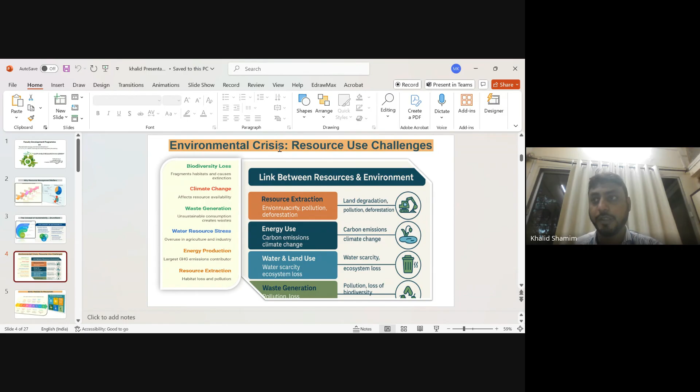Then we have to understand water stresses, like depletion of aquifers, water qualities - that is more important - and water waste generation. That is again one of the important aspects when we talk about resources and environments.

When we think about environmental pollutions, we have to think how these pollutions are being created with respect to industries, population, habits, quality of life, climate change, and biodiversity. This is important because these two factors are correlated with each other.

When we have resources, we have to think how the resources can be benefited with respect to environments. We have to think how this environment can be more efficient, more beneficial to these resources. That is important when we talk about the link between the resources.

Now when we talk about this link, we have to understand how the global markets think about it, and we have to think about the sustainable development goals. This is a very important criteria when we think about sustainability, because 17 sustainable development goals have been identified by the United Nations Sustainable Development Goal.

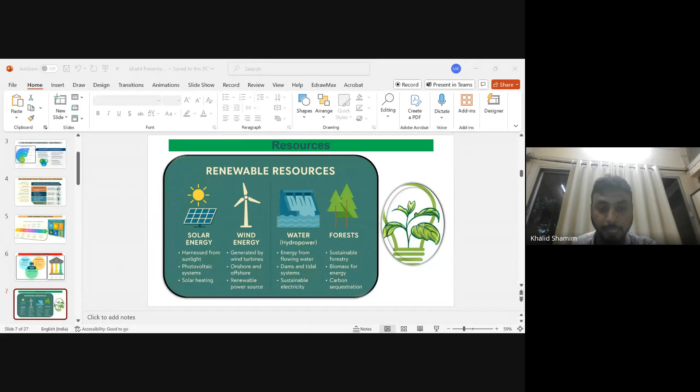Now when we think about non-renewable resources, there are not many of them, but we have to understand they are finite resources. We do not regenerate or recycle them, and we have to understand how they are extracted and then consumed in non-reusable ways. They are more vital for industrial growth and technological development, so there is a lot of importance to these non-renewable resources.

When we think about fossil fuels like coal, oil, and natural gas, they are generally the backbone of industrialization because they yield high energy, giving high energy density. When we go for coal, it generally goes for power energy, mainly for steel industries. So we can understand how these resources are more beneficial to industries and societies, when we think about petroleum and natural gases.

So the challenges that we are facing are nothing but the greenhouse gas emissions, the air pollution emissions, like CO2, NOx, SOx, PM 2.5. These are the challenges when we go for fossil fuel consumption.

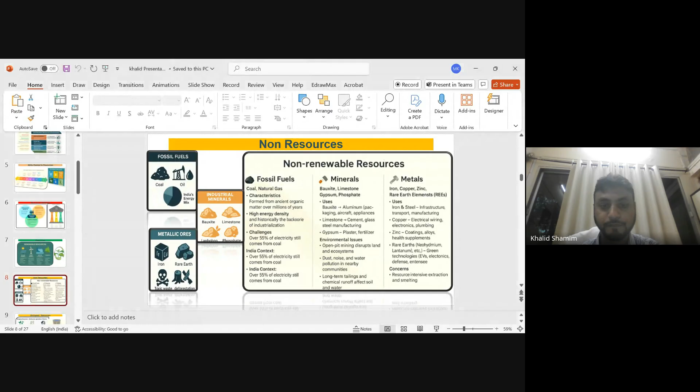Now this is again an important aspect about biological resources. These biological resources generally refer to naturally occurring living organisms which drive ecological balance, livelihoods to security, and generally include wild species, crops, marine organisms, and microbial biodiversities. So when we think about biodiversities, the variety of life forms like genes, species, and ecosystems are generally there.

Which generally supports ecosystem services. When we talk about water purification, climate regulation, it generally supports water purification type of things, wastewater treatment type of things. It generally acts as a natural insurance system for environmental shocks.

And it is also used for medicines, for crops, and biotechnology innovations. And when we think about the challenges, it's nothing but deforestation, pollution, habitat loss, and over exploitation, which generally leads to one of the climate changes. So this is again when we think about biological resources, the term comes to biodiversities.

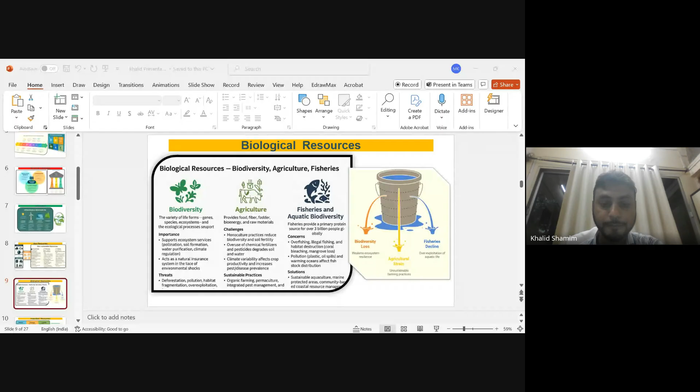Now when we think about this sustainability, as I have already given you solutions like renewable resources, non-renewable resources, and biological resources, the main criteria is nothing but the important resources that we deal with day to day, that is, water resources, energy resources, and land and soil resources.

Very important when we talk about water, which plays an important role in life, used for drinking purposes, for agriculture, energy production, industries, and ecosystems. It must be free from diseases, as it affects public health.

If it is affecting public health or community health, that means the resource is not beneficial to society, and that again leads to economic impacts.

When we think about water resources, the important parameter is water scarcity, as over 2 billion people are facing water stress as per UNESCO. This is generally caused by over-pollution and over-population.

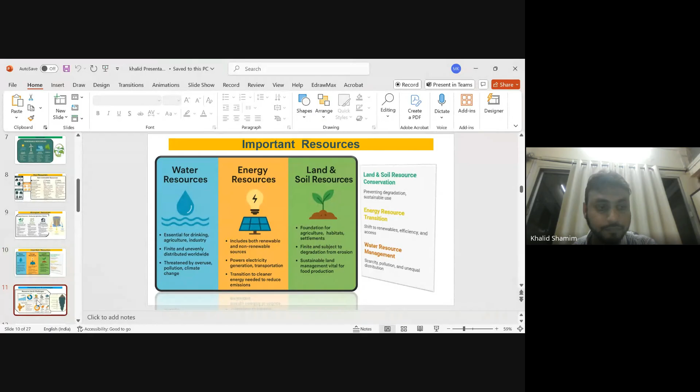So this again relates to the challenges we have already discussed, such as food security, water scarcities, overfishing, and deforestation. So we'll move ahead.

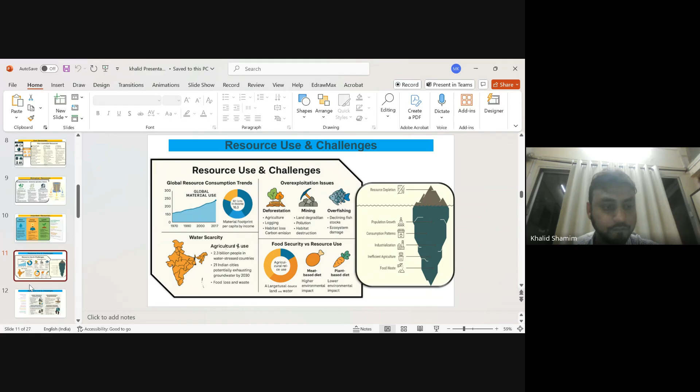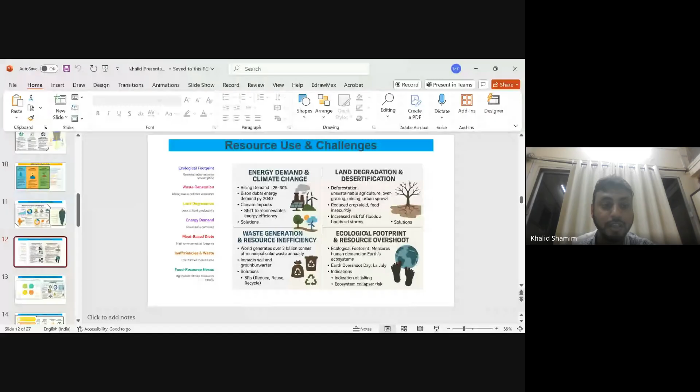Now, when we think about these challenges - overpopulation, climate change - we have already seen waste generation, energy demands, ecological footprints. These are the challenges we are facing globally, faced through per capita footprints and resource inefficiencies. We are thinking about land degradation, over-exploitation issues, deforestation. These are the basic challenges that every country, every nation is facing: energy demands, waste generation, land degradation, inefficiencies, and food waste.

Now when we think about policies, or the principle of sustainable resources management, we have to be more focused on reduce, recycle and reuse. These three concepts are more important when we think about this principle. For reduce, we have to be particular about minimizing resources at the source. For reuse, we have to think about how we can reuse materials or things. For recycle, we have to understand the procedures of recycling. So based on this principle, we focus on reduce, recycle and reuse. Second is the economical concept.

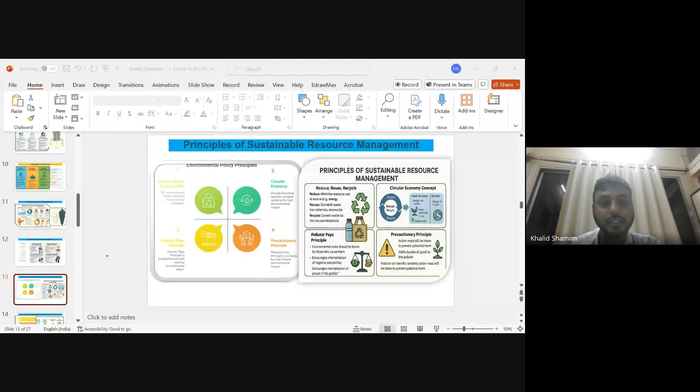Then there's the precautionary principle - action must be taken in terms of law, in terms of some sort of act, in terms of equities, intergenerational equities, and balance between water, electricity, and anything that leads to environmental injustice. We have to make sure there's more emphasis on these principles. So this is the principle of sustainable resources management.

Now again, based on the principle of sustainable resources management, we have integrated resources management. This generally coordinates and has a holistic management approach - for example, a holistic approach for water, land, energy, biodiversity - and cross-sector collaboration between governments. Because it's integrated, it benefits efficient resource allocation, reduces trade-offs, and encourages co-benefits like water retention and biodiversity. It is also important when we talk about equity in resources management.

Equity in resources management - we think about this equity as nothing but fair allocation. There are challenges when we think about equity of resources, and these challenges generally align with the sustainable goals. We have to identify energy efficiencies, think about policies, investments and investigations based on that. So this is resource equity in resource distribution.

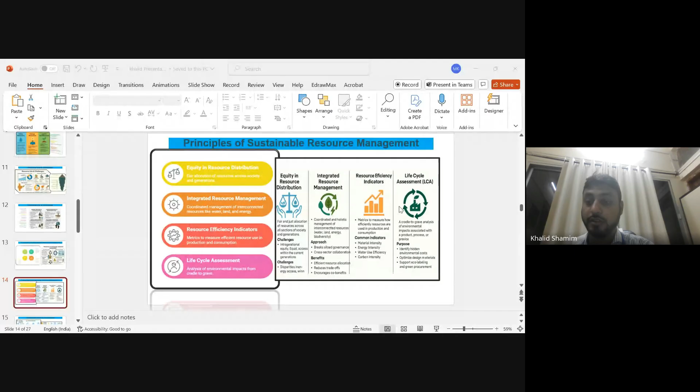Then life cycle assessment - this is a cradle to grave approach for environmental impact. The purpose is to identify the hidden environmental costs based on optimum designs and materials, and to make sure it supports green environments. More stages are given importance, in terms of raw material, end of life disposal factors, and recycling process has been given more emphasis in life cycle assessment, along with manufacturing and distribution systems. So this is about resources management.

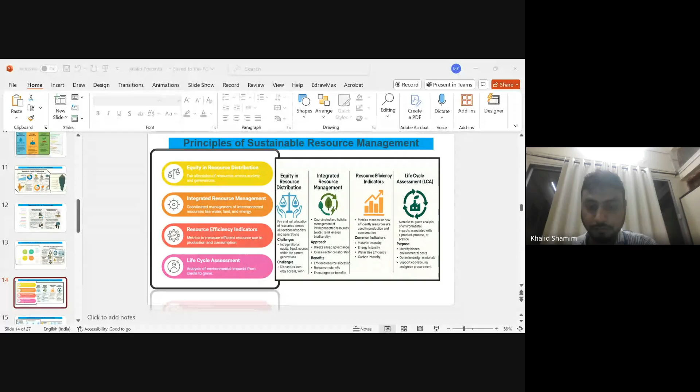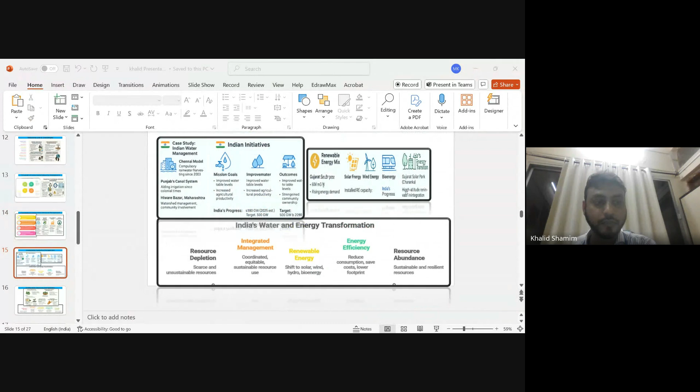Sustainable resources management - now when we think about these sustainable resources, this is the case study of Indian initiatives. We talk about Indian case studies, Indian water management, and what Indian initiatives have been taken place.

When we think about the case studies, we put more emphasis on the Chennai model, where compulsory rainwater harvesting systems have been adopted since 2003. This makes sure water resources are safe, and it has been one of the good models, good practices.

Again, when we think about the Punjab canal system, it generally aids for the network for irrigation systems. And Hiware Bazar is one of the areas in Maharashtra where we find proper watershed management, and water stress is being reduced just because of this watershed management.

Based on that, more emphasis is given by community engagement, and more emphasis on the mission goals, where improvement in the water table level is given. More emphasis is on water quality monitoring, grey water use, and agriculture sector productivity. More emphasis is on sustainable groundwater management and water quality - whatever water quality is given must be good enough for consumers.

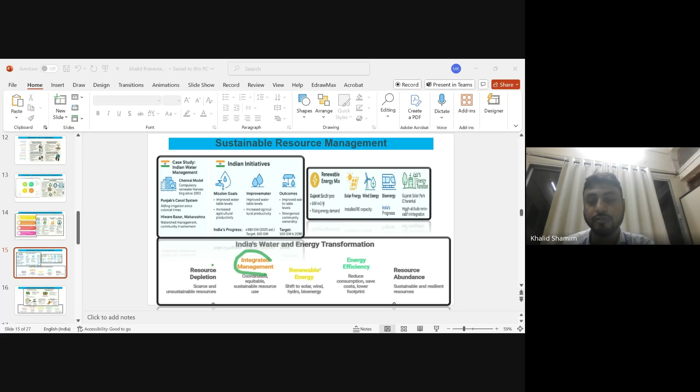Now when we think about sustainable resources management, there are four to five important parameters like forest resources, community forest management, and agriculture sectors. When we think about forest resources, we are maintaining ecological functions, biodiversity - it's important that forests are enough because they consume more carbon dioxide, so it's very important for biodiversity, for soil protection, and for communities which rely on these forest resources. So community forest management is very important for sustainable resources management.

The important thing is local communities which are protecting and managing the forest, maybe for rural populations, enhancing the local livelihood of people living in local areas. Now there's joint forest management, which focuses more on the efforts taken by forest departments and local communities. This improves forest quality, and we generally give occupations to people near that particular area.

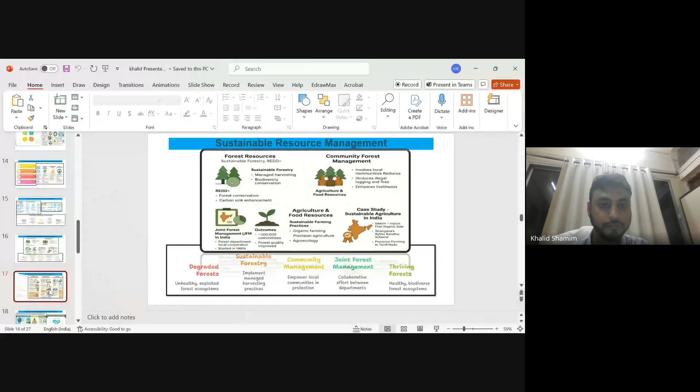Sustainable resources management also comes in three or more four sectors: when we talk about minerals, when we talk about the industrial process, when we talk about construction activities, when we talk about urban resources management. So when we talk about urban resources management, we must emphasize the city designs, which may go for green buildings or energy efficient design type of things.

In sustainable cities, sustainable infrastructure generally goes for waste collections, more important in the infrastructure, waste collection, energies. Then we are more emphasized on rooftop garden type of things. So this is nothing but urban resources when we think about sustainable cities. And the Indian initiative is nothing but the 100 cities focus, which may go for these sustainable resources kind of things.

But when we go for construction, means C&D waste process, construction and demolition waste, we know that it is the waste which generally generates more numbers in tons when we think about it, and mainly includes steels, wood, plastics, bricks, and it becomes more significant in metro cities. So the impact generally goes into mining, energies, and reducing the landfill sectors.

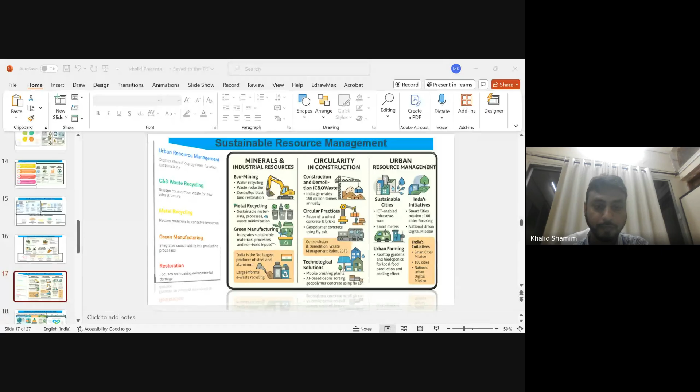Now, the important scenarios or experts show how governments are taking more thinking on the policies, governance and economics, because this is the sector where the government has to take a lot of initiatives, and the government has to make certain types of policies which must benefit the societies and benefit the resources.

We generally focus on poverty, we generally focus on ecosystems and proper land use, which is divided into social and economic strength dimensions.

When we think about these sustainable development goals, it generally promotes green economies and frameworks for sustainable development. Goals 6, 7, 12, 13, 15 are very correlated with sustainable resources management. We generally give more emphasis on forest conservation, greenhouse emission reduction, and circular economy waste reduction.

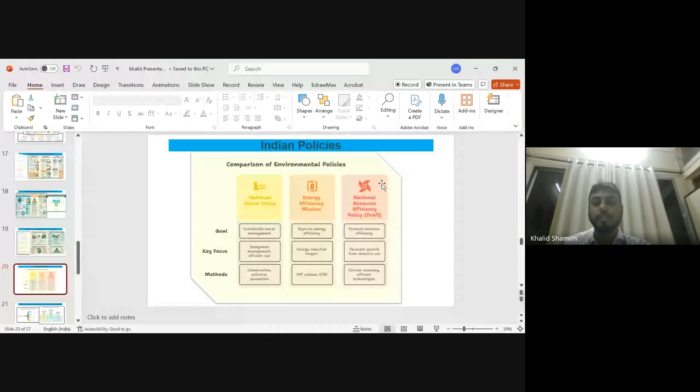Now when we think about Indian policies, we have a lot of policies, but we may focus on these three: national water policy, energy efficiency mission, and national resources efficiency policy, which generally promote sustainable water management. Their goals are water management, sustainable water management, energy efficiency, and promoting proper resources management.

And the main methods generally focus on consumption, conservation, pollution, and preservation. These methods are based on policies like PAT policies and circular economy policies.

Now, when we think about the case study, let's go for one or two case studies. First is the Singapore case study. This is a global case study where it has four important parameters, where imported water and four national taps have been given for good resources management, which generally aims for overcoming its fresh water scarcities. So four important things are given.

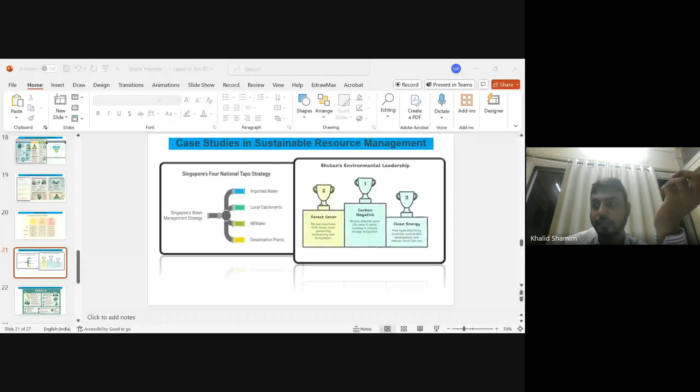First is the imported waters - this is a long term arrangement where water has been imported from Malaysia. Then rainwater harvesting system is again one of the key factors for canals. And we can understand the desalination plant, where seawater has been converted using energy efficient desalination technologies, adopted for good amount of sustainable resources management.

And based on that, the innovations - when we talk about catchment areas or public awareness - are there in Singapore's national taps strategies, which has given more emphasis on the Singapore water management strategies.

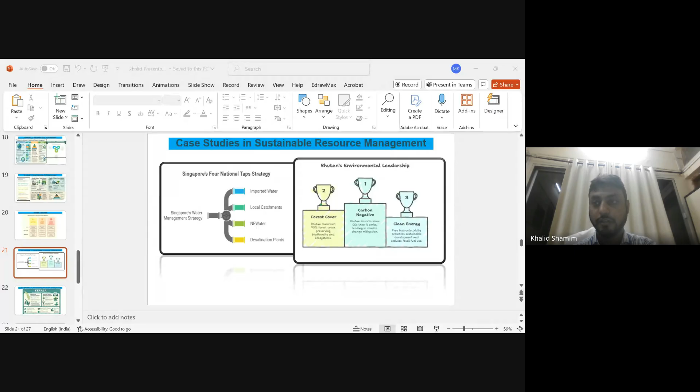And when we talk about Bhutan, we think about forest cover, being carbon negative, and clean technologies or clean energy being given more emphasis in Bhutan's leadership or Bhutan case studies.

Now, when we think about the sectors in Indian scenarios, we have a role model of Kerala, which has decentralized resources management. Decentralized resources management is given in Kerala's terms.

So when we think about Kerala, the key concept generally emphasizes decentralized governance systems, especially in managing local resources, managing health, managing education, managing water consumption, managing environmental sustainability, and generally depends upon the local bodies. It gives more emphasis on the local area, around the local bodies, which may be 35 to 40%, with more emphasis on those things.

More sustainable resources management generally initiates missions like the Haritha Keralam mission, which generally focuses on water conservation, sanitation, and organic farming.

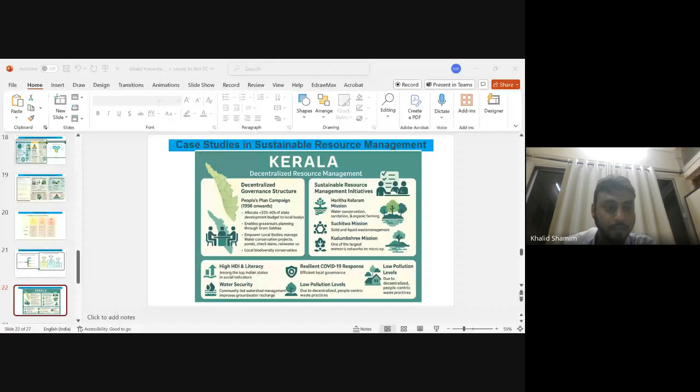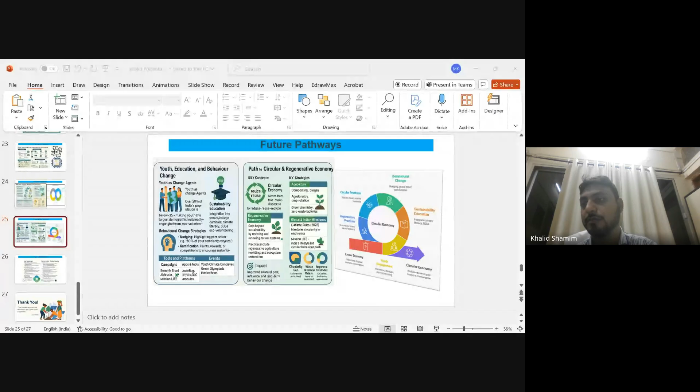When we go for cities or nationwide, we must be more important about wetlands and parks. Based on energy, we must have more regenerative practices on bioenergy kind of things. Based on these missions and e-waste rules and criteria, we must emphasize and mandate lifestyle for circular economic pathways.

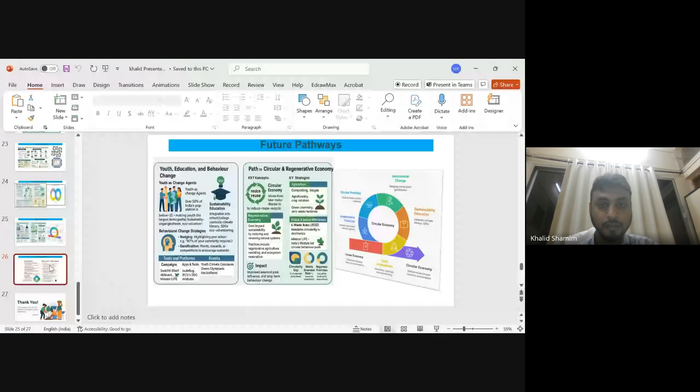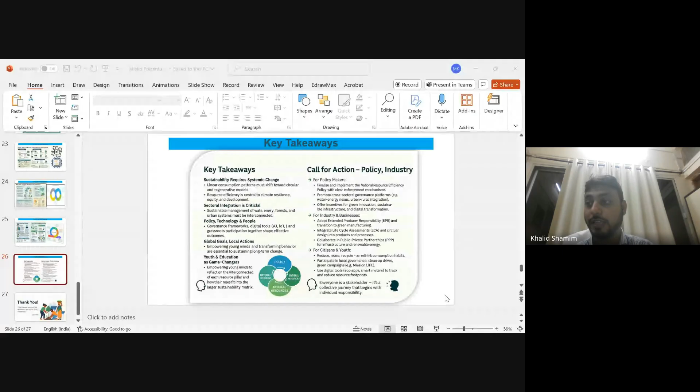Last are the sectors where we can take sustainable action. The key takeaways are mostly based on sustainability, integrations, policies, technologies, and people. We understand how global and local actions are taken care of by sustainable development goals and net zero goals. Examples include the Kerala decentralized model and smart cities. When we think about youth and education, empowering young minds is very important for transforming behavior and is essential for sustainability and long-term changes.

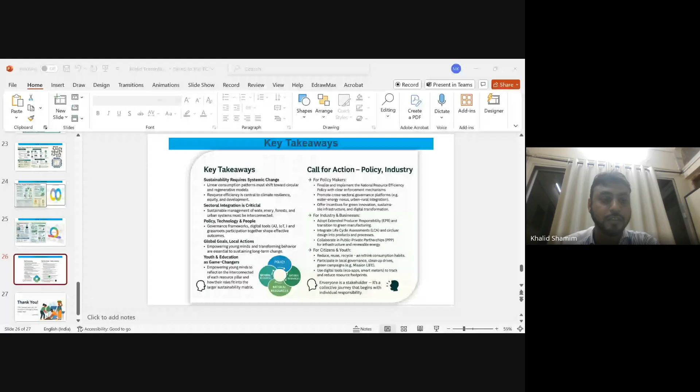Again, we have to place more importance on policy framing, on technologies, and on communities, because these three factors are crucial when we think about communities. These people are the platform facing these issues, and they are also the ones who can give the solutions. Last is nothing but natural resources, one of the resources which are depleting day by day. So it's imperative that through our actions, our policies, our technologies, and our community actions, we preserve these natural resources, and based on that, address the criteria and challenges in resources management, because sustainable resources management is a key factor for today's scenarios. Thank you very much for your patience.

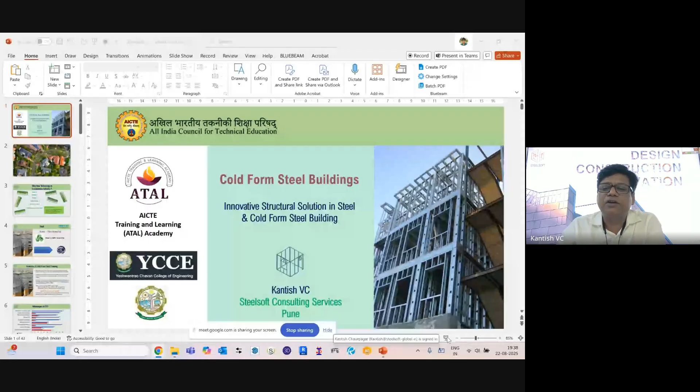There are a lot of people around, more than 80 engineers, who are interested to understand what is steel structure and what is cold form steel structure. I would like to give you some information, because there are many things people are not aware about regarding steel construction, and what exactly steel is doing in construction when we talk about overall steel buildings.

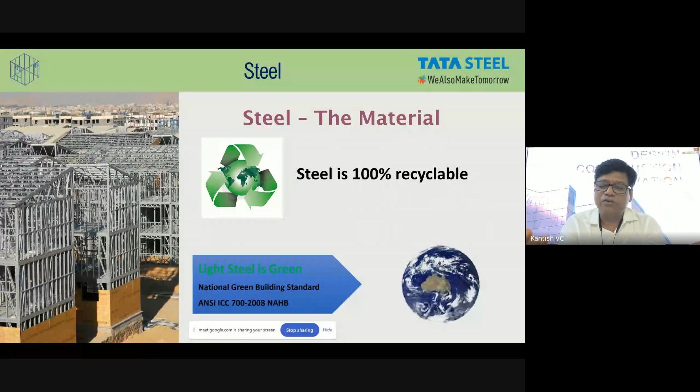So definitely it is one of the best materials from the perspective of overall construction. But for that, we need to understand what is cold form steel, or cold form steel framing.

This is really a very old technology, not a new one. In India we have IS 801, published in 1975, but that code is still being used from 1975 - it has not yet been updated. So it's important that we update that code also, so that all engineers, builders, and architects understand that this is one of the materials we can use for any type of construction, particularly for certain types of construction or occupancy which I will show in the next slides.

So basically around 1850, particularly in World War, they used cold form steel as fast track construction, having thickness around 1 mm to 2 mm. This type of technology was generally used in the armies, or particularly in war-prone areas, because of the fast construction required. Even now it is used in post-disaster areas.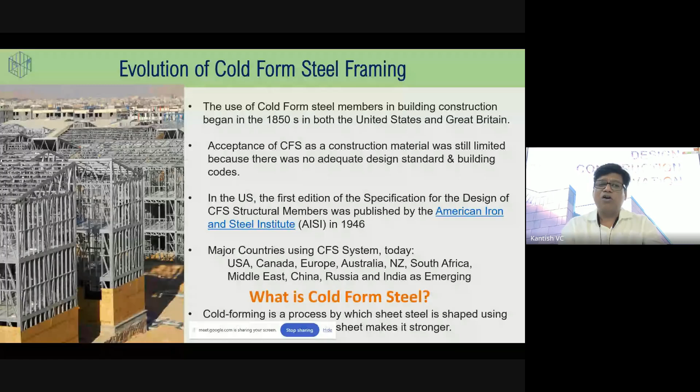But with only this one section, you can prepare the walls, floors, roof trusses, and cantilever balconies - everything with only one single section, which I have shown on the left side of my presentation, where you can see a ground plus 2 story building coming up with this technology.

Now, most people ask about advantages. I prepared this a little differently - I asked more than 20 people, including architects, big builders, and some IITians doing R&D in this field, whether cold form steel decreases construction time. All 20 people said yes, it decreases the construction time.

So I'm giving one example by considering that I want to build one house of around 2000 square feet, ground plus one. It doesn't take more than 60 days to complete the overall building, a villa or that type of construction. If you go with a conventional concrete or traditional method of construction, it takes from 6 months to 9 months. So definitely the construction time reduces.

Increase uniform quality. For example, if I am taking this steel from Tata, JSW, POSCO, SAIL, anybody, and I say I want a yield strength of 550, they will give me a coil, and from that coil I will generate this. It means the overall building will have a single yield strength, 550. So you will have uniform quality in the material also. More consistent product means all the mechanical properties of that steel would be similar throughout the overall building.

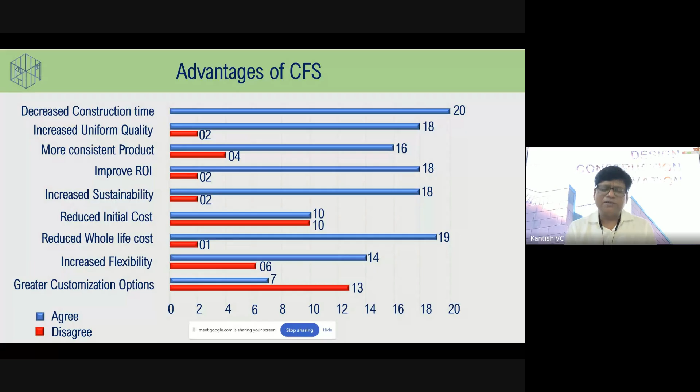So that's why 13 people out of 20 disagree. 7 people say yes, it's a pre-engineered building, so why should I have to customize once I have finalized how the villa has to be there.

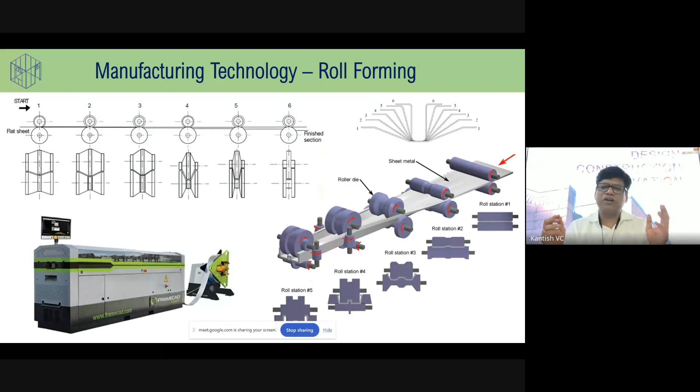As I said, I've just shown a diagram which shows one slitted coil and how it is bending in the machine by roll forming, from the flat, from this portion, and then it is bending and giving the shape. Now this is like a FRAMECAD machine, and this machine generally generates these channel sections, and these are all automated. Only one person is sufficient to build almost like a 1000 to 2000 square feet villa. Only one person is required to fabricate this material overall.

If I talk about a villa of 2000 square feet, which is approximately 200 square meters, approximately 4 tons of steel is required. So in one shift, or 8 hours, all the fabrication material can be produced. So there is no lack of material, no manpower shortage, and overall 30% of time reduction can happen.

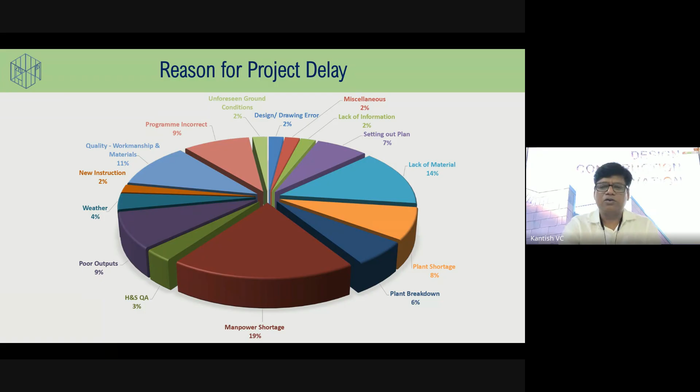Then the most important point comes out to be the opportunities. As I said, where is the opportunity coming here? So basically, India is one of the largest growing economies in the world with around 3 trillion GDP, and construction in India is emerging as the third largest sector globally, and it may reach up to 750 billion in value by 2025.

Cities which contribute over 80% of the GDP by 2050 need to have faster sustainable growth to ensure the quality of living. And that is why schemes like Pradhan Mantri Awas Yojana came into picture. To cater to this growing population, India must build 600 to 800 million square meters of urban space every year till 2030, which means a new Chicago every year. This is the demand right now in India.

So from that, we need to think from the perspective of sustainability also, because you can't put everything onto concrete. Let's have some new technologies, because Pune, for example, is generating around 5 lakh tons of concrete yearly. And now those people who are experts in concrete may tell us how much carbon can be generated from that concrete.

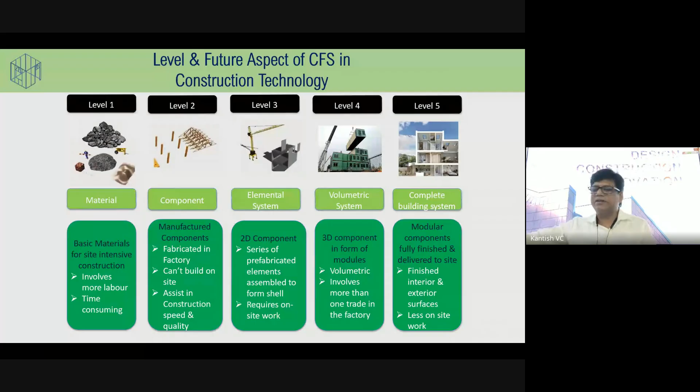Now, when we talk about the future and the level aspect of cold form steel in construction technology, let me describe the levels of construction. Level 1 is material-based construction, where you bring the aggregate, bring the sand, bring the cement, bring the water, and mix it at the site. There might be technologies coming up in that mixture, considering ready mix concrete, and so on. But these are the approaches we call level 1 or level 2.

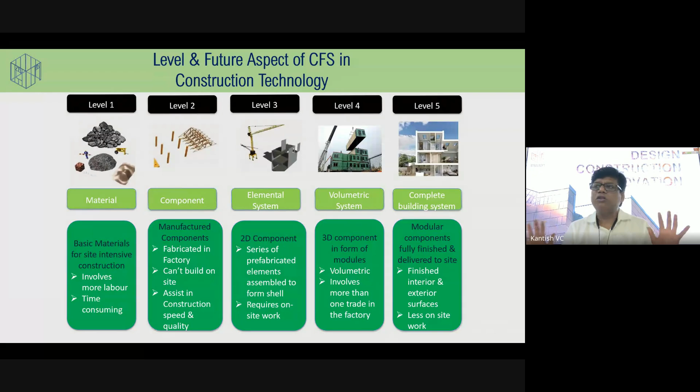But right now, in the US, most people are going with a volumetric system or complete building system. It means you are going with offsite construction—in the factory you design, fabricate your overall room, put it into a container, put it onto a truck, and deliver it at the site. This technology is becoming great, particularly in the US region, where all the finishing is completed in the factory itself.

Now, what are the components of this cold form steel? For example, in a ground plus one-story building, the roofing system is like a truss system having a channel section as the top chord, bottom chord, and inclined web members, and you can generate the roofing from that, having a color coated sheet, roof shingles, clay tiles, or whatever cladding system can be used.

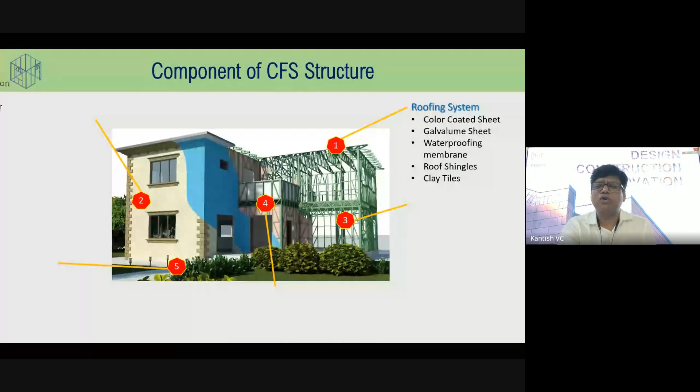Cladding means sheathing—either using a fiber cement board, an OSB board, a PPGI sheet, or a shingle, for the architectural aspects. The wall system also has a wall of 89 that provides insulation, like rock wool insulation, and then the cladding of fiber cement board from both sides.

The structure, as I said, is 0.8 to 2.5 thickness galvanized material, 270 GSM. That means if I put that into salt water for 50 years, nothing is going to happen with this steel. We generally use 275 GSM in coastal areas. So this is the type of material we generally use in the structure.

Then the flooring system, again, with channel sections, providing a deck and a little concrete on top so vibration should be controlled. One important thing: in US and Europe most people like a ply type system, but in India we don't like vibrations in the floor. We feel like 'yaar gir to nahi jayega ye' kind of thing. So we use 20 to 30 mm concrete and tiles, structurally increasing the stiffness of the floor so vibrations can be reduced, and the frequency of vibration should be in control as per National Building Code.

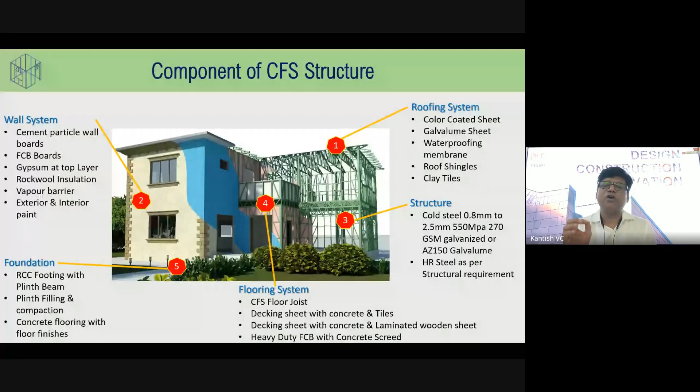Then foundation is similar, but it is very lightweight foundation, because the overall structure is light. You can believe it, the wall weight is only 0.5 kPa, which is nothing but 50 kg per square meter, which is very less compared to even the brick wall.

Advantages: I calculated these based on the material, based on the benefit to the builder, and based on the benefit to the customer, the end customer. From the material perspective, it is very strong, inorganic, dimensionally stable because we are taking it from the factory, consistent material quality, non-combustible, and earthquake resistant.

Believe me, since the total overall mass of the structure has been reduced, it is particularly very earthquake resistant. For a single villa of 1000 square feet, it takes more than 10,000 screws. Now imagine, when the earthquake comes, there are 10,000 screws, so there is no sudden collapse of this building compared to any other methodology, even wood. So there is no sudden collapse in this type of structure, and since it is steel, it has elastic properties, so it generally enjoys the earthquake.

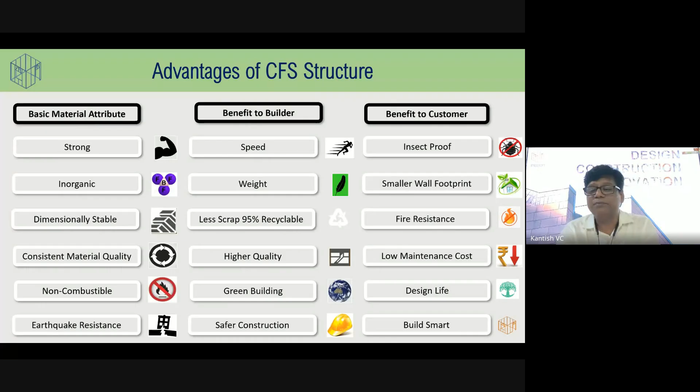Benefit to the customer, those who are staying in it: insect proof, smaller wall. The best part is that the wall thickness of conventional construction is 230 mm, which is 9 inches, but in this case it is almost 100 mm, which is 4 inches, even on the external side. Also fire resistance, low maintenance cost, design life, and you are building a smart construction.

Now, from the engineering perspective, a lot of software opportunities have come up. Many people ask, 'why should I go with this technology?' But believe me, most companies particularly in India are doing structural design and everything in India, and giving the drawings and everything to clients in the US or Europe. So basically this is again one big software opportunity.

For example, BIM, so Revit Structure. Now Revit also has its own library of cold form steel. Then Tekla is one of the biggest software which we generally use for hot roll steel, but they also have cold form steel members in it. Then Structsoft, Vertex, these are particularly cold form steel softwares which generate the fabrication drawing as well as the machine drawing also.

FrameCAD structure, FrameCAD detailer - these are the FrameCAD machine manufacturer's own software, FrameCAD structure. In fact, India has also sanctioned this FrameCAD software. India's BIS, Bureau of Indian Standard, has sanctioned this type of software for use, particularly from a structural design perspective.

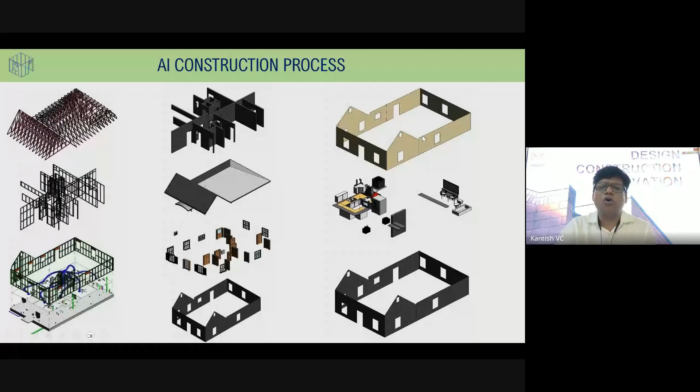Then the AI construction process. Since you get an IFC file from Revit, you can use artificial intelligence for the construction process - for example, the truss system, cladding system, painting system, electrical and plumbing systems, doors, windows, and all the painting work. I have shown almost 9 diagrams which, if compiled together, give you the picture of the construction, showing each and everything, which we give to the contractor to build such construction in a very fast way, with all the connections.

So why I say that in this construction only skilled labor and not more than 5 people is required - it's only because everything has been pictured, everything has been given in 3D itself, so they can directly do nuts and bolts for the overall construction.

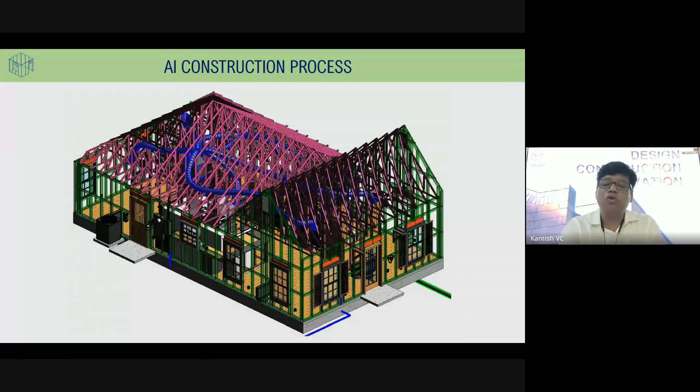Now, as a committee member for IS 801 - as I told you, IS 801 is a very old code from 1975, outdated - we have submitted IS 801 2025 as a draft to the Bureau of Indian Standard. Those who have read IS 801 1975 know it's very compact and a lot of detail has not been mentioned. So basically we tried to prepare the chapters the same way as IS 800 2007, considering the most important chapters like connection and joint as Section 10 into that.

Design assisted by testing - this is one of the best methodologies, where innovative people who think 'I want to do something new in the system or construction' can use Section 11 of the code, design assisted by testing. There are a lot of testing labs - NABL labs, CBRI labs in Roorkee, and we also have SERC lab. So you can prepare your own innovative design, get it sanctioned through Section 11, and use it in construction.

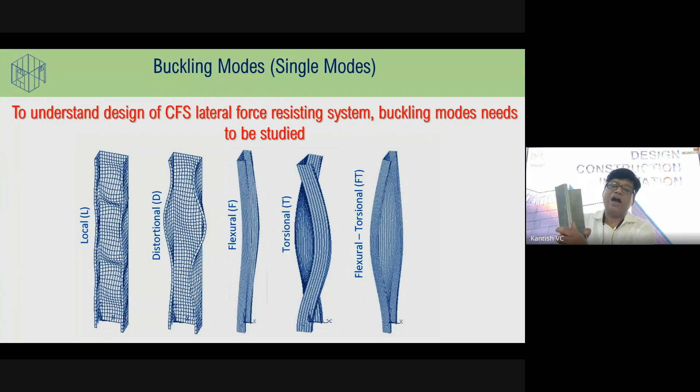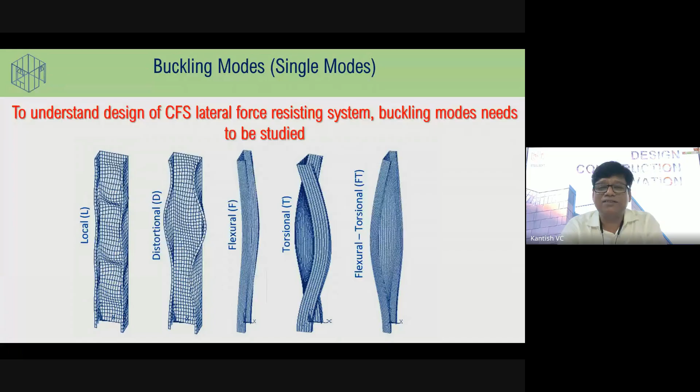The buckling modes are: first, local buckling mode - when I push a compressive member, what happens is a local failure. Second is distortional failure, where the flanges move to the outer side. Flexure means when I bend this part, it bends in that direction. Torsional is when I apply torsion to it. And torsional-flexural means a combination when both forces are acting together. These modes need to be understood, and based on that we have added some sections, chapter 17, into IS 801.

So to understand that, I have given a very simple example of a house and how the forces are acting onto it, like vertical and lateral forces. On the left side, you can see the vertical forces, which are gravity forces because of the dead load and live load and any imposed load coming onto the building, causing downward forces. The second type is lateral forces, and how they act onto any structure. So basically any house is a component of structural members.

In our case, we have roof members, wall members, floor members, and the bottom track which rests onto the foundation. So how are the forces transferring? For example, lateral forces coming in are collected by the floor as a floor diaphragm, and that transfers to the wall, and from the wall to the foundation. That part I have shown in terms of a free body diagram.

For example, when roof load comes as wind load, this acts as a collector element to the top track of the wall, and then to the lateral resisting system like a shear wall. Now, what would be the type of shear wall? I will explain that in the next slide. So through the shear wall, that transfers onto the floor, and the floor diaphragm forces again transfer to the lower wall.

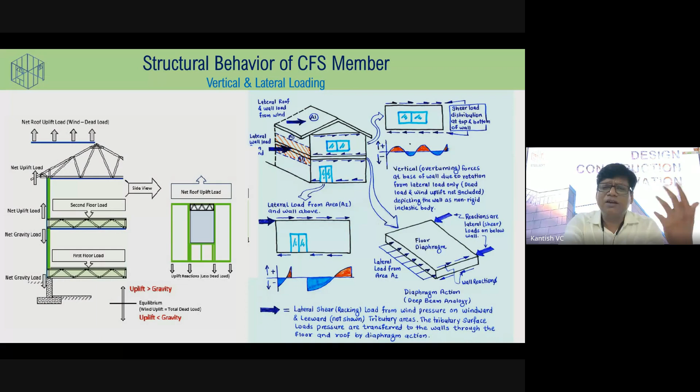The free body diagram of the lower wall shows the lateral load from area A2, meaning whatever the wind forces are, and then this lateral load onto the ground floor wall at the top, transferring it down to the ground floor. This is something like an equivalent static area method from IS 1893 that is applicable through the free body diagram.

Now that force, when it comes to the ground floor, how is the wall going to deflect? So lateral force is coming, and the control sideway needs to be designed.

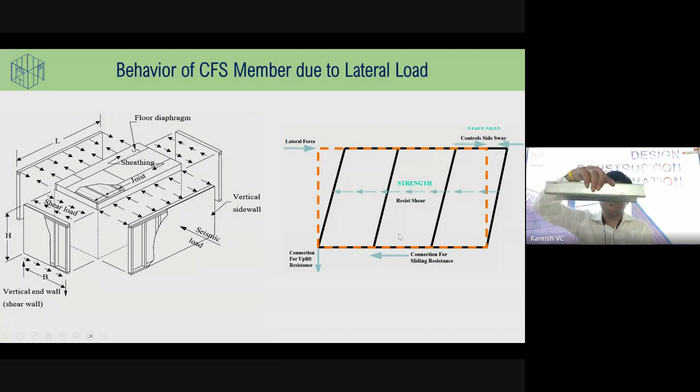We have vertical members as channel members. This is a wall actually. So in the wall, we have channels at every 16-inch on center, or 400 mm on center. There is a bottom track on the bottom side, a top track on the top side, and the vertical members are connected. So it's like a panel.

So this panel has a lateral force on one side, and we calculate what the resisting shears would be. Due to this, the wall is going to deflect, so there would definitely be an uplift and a downward force onto the foundation. That has to be studied in the next slide.

So this is a shear wall, a cold form steel wall, and at the bottom you can see a plinth beam. This plinth beam and the cold form steel wall are connected by anchor bolts at every 600 mm on center. Then this wall is clad with a fiber cement board, with screws at every joint.

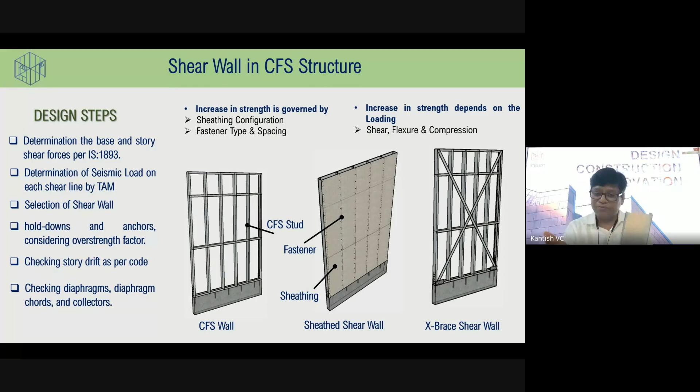This wall with this cladding system has lateral force resistance, so this sheathing, which we call fiber cement board or OSB board—there's also calcium silicate board and gypsum board—has lateral resisting capacity. Right now our code doesn't have these capacities, but in the US they test by cyclic or monotonic methods, applying forces with an actuator to calculate the resisting power of the sheathing. You can use this as a shear wall in structures less than 40 feet in height.

So particularly for villas, you can design this type of wall as a shear wall. If your forces are very high, for example if you are building in the northeast or north where zone 5 applies, then X-bracing shear wall comes into the picture. I've mentioned the X-brace shear wall in this slide, where this is a ground plus one structure.

On the left side, I have shown the sheathed shear wall and how it is connecting. At every end of the shear wall, such type of hold downs is required. This hold down will take the capacity of uplift and downward forces, which I have mentioned in the free body diagram.

So for example, FH is the lateral force. It would transfer through the strap bracing up to the bottom of the concrete, and at this junction, this connection is called a hold down, which I've shown here, and that's what we have to use in the structure.

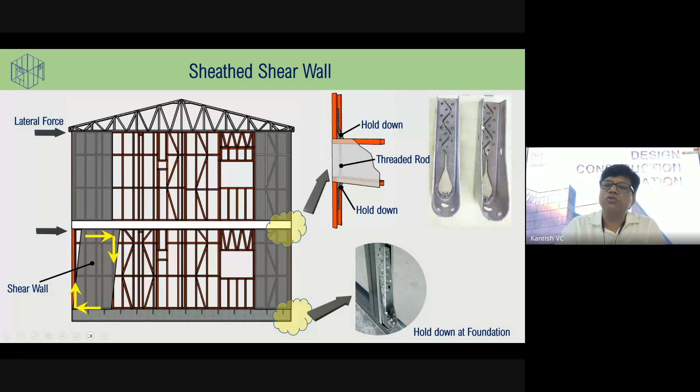So this is the overall X bracing which we generally use, in such a way that the forces nullify into the ground, and the plinth beam or isolated footings connecting with the plinth beam have to be designed for these downward forces.

So basically in this way, the overall cold form structure comes out like this. I want to show this part because of why it's important from the perspective of sheathing.

Right now there's a lot of research going on in India, because we have a fiber cement board made up of fibers and cement, with a thickness of just 9mm. We are doing cyclic loading tests to calculate the lateral resisting capacity of that material, and based on that you can design the overall structure, like a 3 or 4-story structure or villa structure, using this technology. You can build earthquake resistant and wind resistant houses with this type of technology.

There are a lot of questions asked about whether we can use this in high rise structures also. Some research has been done, and we have also done a 16-story building in Jammu with this type of technology, using X bracing, and it's a residential building which we have completed.

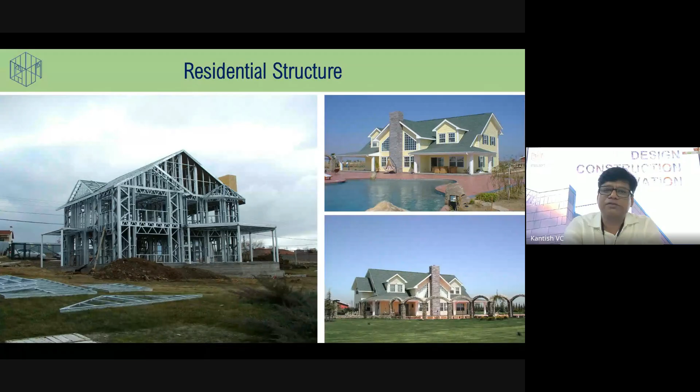This is again a villa which uses 100% cold form steel, not more than 1.15mm thickness, and we built the villa shown on top.

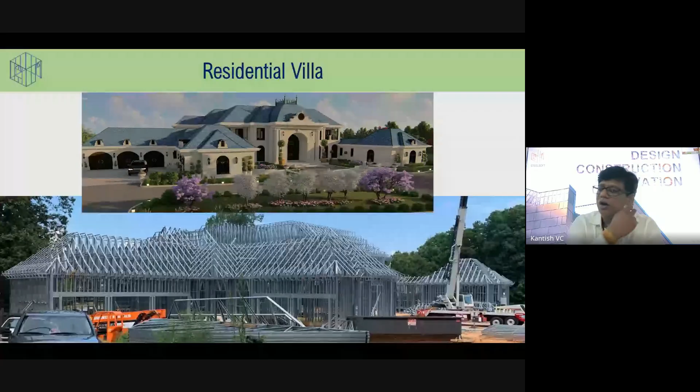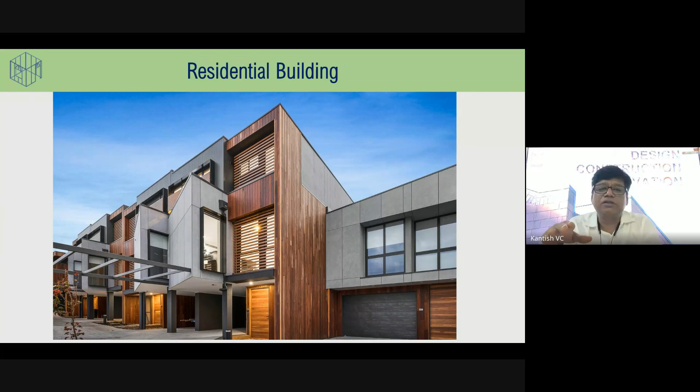These are residential buildings, like row house type, where the cladding system used is a metal cladding system - metal and ACP cladding have been used in this one. This is a combination of hot rolled steel and cold rolled steel.

A very important point is that we have a lot of existing buildings that are old, and we are not able to either reconstruct or add any more stories onto them. But as I said, only 50 kg per square meter is the wall load, so those old buildings can take one additional floor load by using this technology.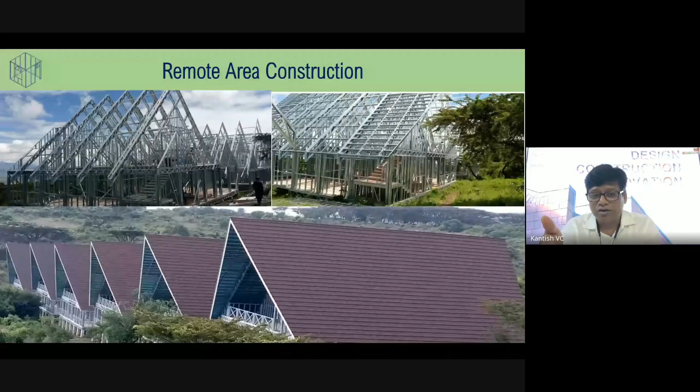So this type of hotel can also be built this way, because this type of construction you can't go with traditional concrete. Basically, in one truck every material comes, and for example in this case we have to build one villa in around 30 days. So that type of fast track construction can be prepared.

These are existing government school buildings, and since they want to expand their schools, on the left side you can see the light gauge steel one-story addition, and on the right side you can see it finished with the full cladding system to get that filling, and a similar look can be achieved.

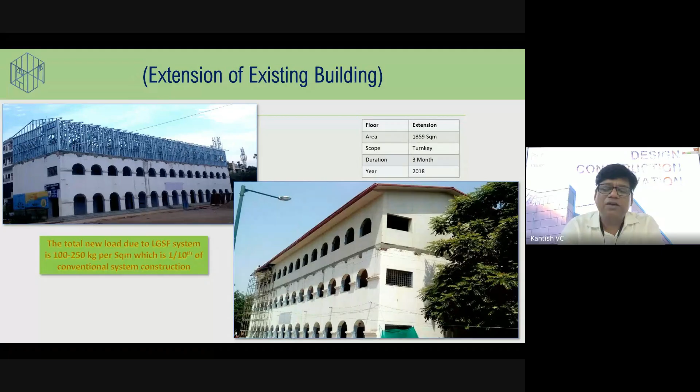Then the college buildings, a ground plus two-story hostel building, that also has been built particularly for IIT Ropar using this type of construction. ITI buildings in MP have also been constructed using this CFS technology. Then this is the ITI building. So then these are some resorts which were built using this.

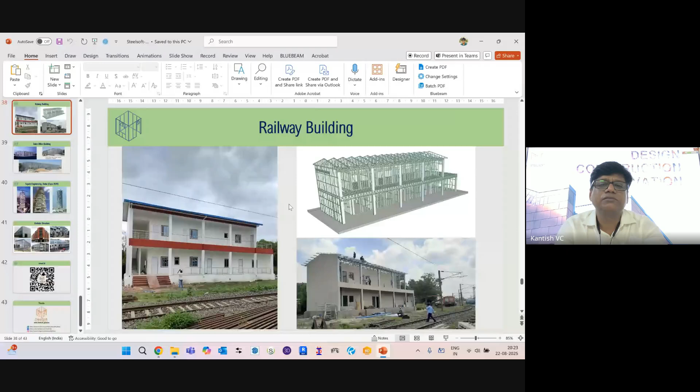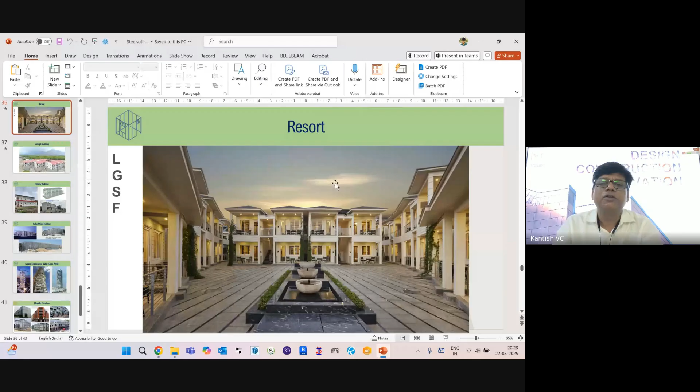These are some resorts built up using this technology. This is again a full two-story building. Some videos have been taken, so let me show it this way. This is one resort in Goa, which we prepared in light gauge steel in around 3 months of time.

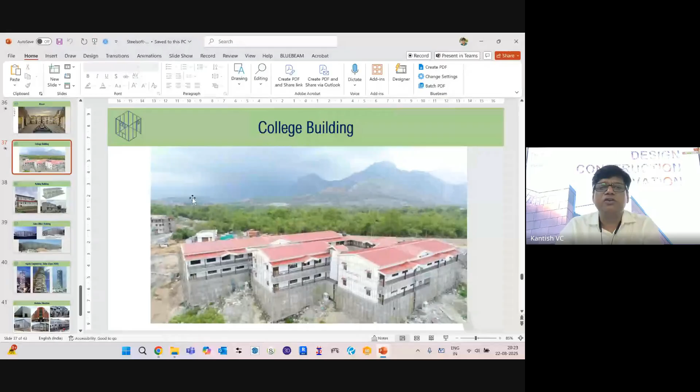Then the college building in Uttarakhand area, made particularly in that region. You can see the difference in the retaining wall and everything, and since they were not able to do that in RCC, the light gauge steel framing technology was used.

Now the railway department also came up with this. They have relay huts. A relay hut is a building that comes before the station, where all the relays and electronic equipment are placed. As per their norms, this building should not last more than 20 or 30 years, as per their RDSO norms.

So we presented this type of construction to them. They liked this technology and said that after 30 years we can reuse it, because in RCC you can't do that - in fact you have to pay money to demolish that type of building. But in this case, you can earn something even after completion of the life cycle of, let's say, 30 years. These are called relay hut buildings, particularly in the railways.

And now this type of building is being used for DRM offices as well. Then a sales office - you can see that a 20-meter truss can be built, and within just 3 months we completed this structure in Dubai. We did this type of construction.

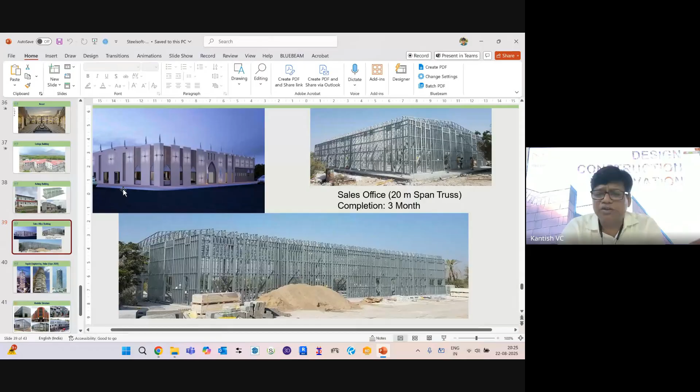This is a 60-story building in Dubai, and all the facade, the outer facade, has been done using cold form steel. For this 60-story building, all the facade, almost 300 to 400 tons of cold form steel is used to complete the facade up to the top story.

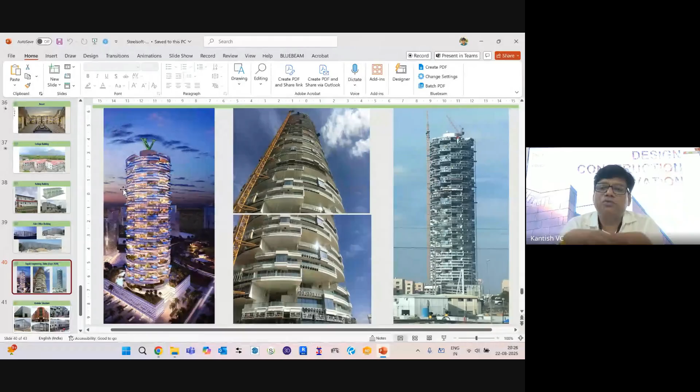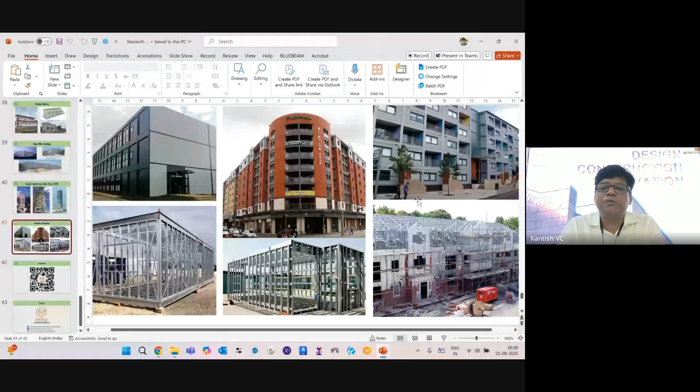Then these are some modular types of construction - on the right side you can see box type structures, and you have to place them one above the other, and based on that we can complete that type of structure. So it's something like that. Thank you so much.

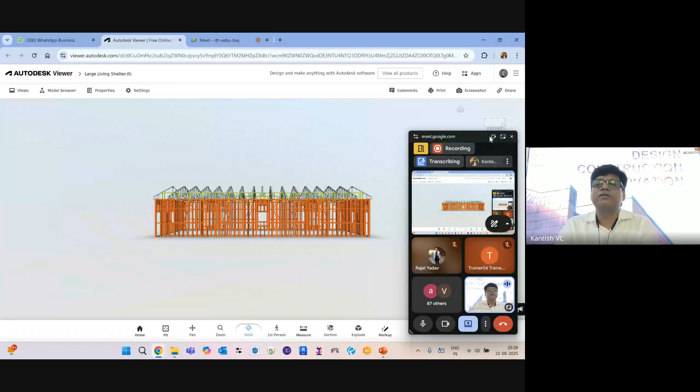One more thing I want to add and show, which I already mentioned, is that in this type of construction we can use this AI system which I already told you about. This is the structure which we have built in light gauge steel, and you can give it to anybody using the Autodesk viewer, and provide the IFCs for that, where you can see all the trusses and everything.

So anybody doing this construction can see it even at the site, even on mobile, so you can check each and every stud, each and every connection of this channel. And as I said, everything is prepared using only a single channel section, the same size, same thickness, and same material quality, and we can build.

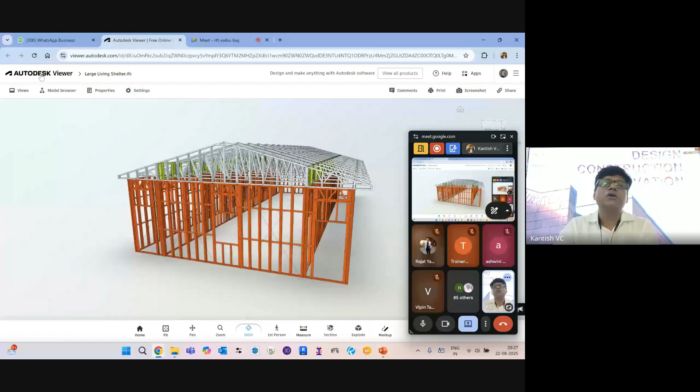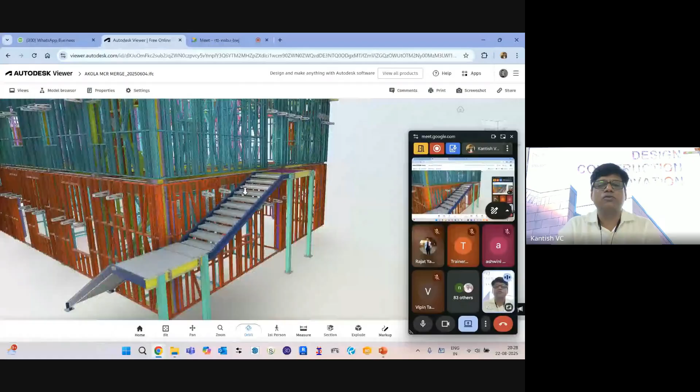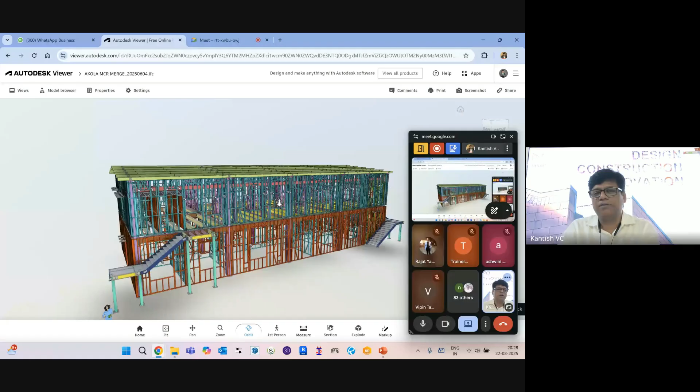Now in this case you can add more. There are a lot of things which you can prepare in this type of construction. I'm just showing some of the projects where there are so many. This is like a control system building where we use the combination of hot roll steel and cold roll steel, and you can see the combination which can be used in this structure. From this it generates the CNC file, put up into the factory, and within a day you can produce around 5 tons of steel by that machine. So this type of overall construction which we can use, there are several types that can be prepared through this construction technology.

So I guess my presentation I completed a little bit early. If anyone has any question, I'm really happy to give you each and every answer to the question. Thank you so much.